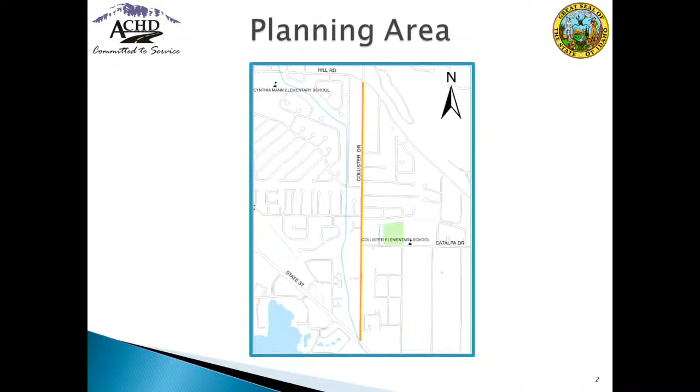The project purpose has two purposes. One is to facilitate the public outreach that clarifies the neighborhood's vision for possible enhancement. The second purpose is to prepare a concept study for Collister Drive from State Street to Hill Road that is in alignment with the neighborhood vision. The second concept study will only occur at the commission's direction. I'll go into further detail here in a moment.

Why Collister? We have actually visited with Collister in the past. 2011 was our first approach in identifying pedestrian projects and pedestrian facilities for Collister. However, in 2011, after the initial outreach, it was canceled at the direction of the commission. We did go back several times since then to visit the Collister neighborhood as well as adjacent neighboring streets to identify what would be appropriate.

We went back in 2015 and conducted the Northwest Boise Neighborhood Bike and Pedestrian Plan, which actually recommended concepts and treatments for Collister. We went back in 2018 with the Bike Master Plan update, where we identified bike facilities specifically for Collister. In 2019 as well as in 2020, the City of Boise identified Collister Drive as their 10th request within their integrated 5-year work plan request.

Our project approach: it's very important as we approach the Collister neighborhood that this time we get it right. We're going to go in there and listen first. We want to engage the neighborhood to determine what improvements the residents as well as the neighborhood want to see. We'll have several commission check-ins, and as I mentioned earlier, we will be coming back to the commission after we've completed phase 1, which is our listening phase. We will come back to the commission to seek approval to proceed with a full concept.

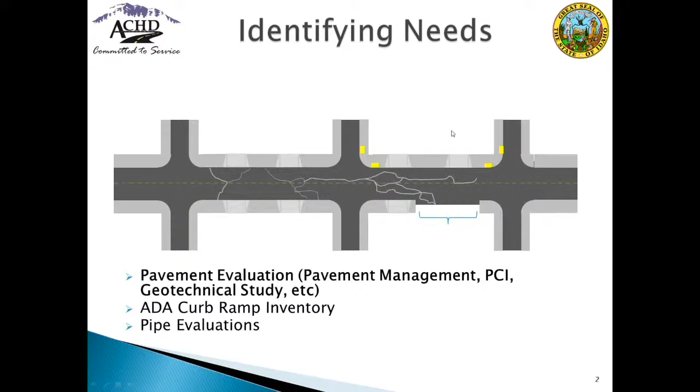Historically, as we've looked at this, what we've done is really focused on that pavement first. We've gone in, we've rehabilitated the asphalt, and in accordance with federal guidelines, we've improved all the curb ramps associated and connected to that. We've replaced any pipe in the area that runs under the road. We want to make sure that we get that repaired at the same time, and obviously we've restriped. But the projects really have not included any level of right-of-way acquisition, and so that's allowed us to be expedient in completing projects, but it also has some shortfalls in that approach.

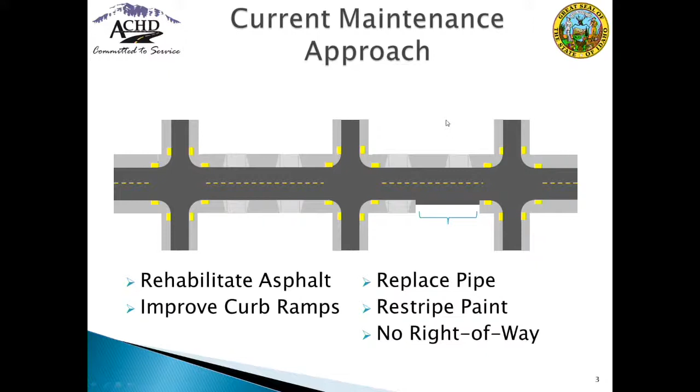As you note, nothing was done about the driveways, and that pedestrian gap still is there. Well, taking a look at the plans that the Commission has adopted, and looking at the desire for enhancing the system and taking advantage of expedient delivery of projects, staff has identified an integrated maintenance approach that, as we go in and look at that, using that current approach, still improving the asphalt, still improving those curb ramps, there are other improvements that we could be making at the same time.

This is just an example of some things, and I'll go over the criteria and the things that we've looked at. This may be in our bike master plan a location for a low stress bikeway, and we may be able to go in there at the same time, add the striping and add the signage that could be included. In our neighborhood plans, there could have been a pedestrian crossing identified, and so the intent is that we would look and identify that ahead of time so that as we are in there doing the maintenance, we could install that at the same time.

The other thing that's always interesting about what we've been doing, and this really was always in compliance with federal law, was we've improved these curb ramps, but in between you may have those driveways that are not accessible. So one of the things that we are recommending and have begun doing is identifying the high priority curb or sidewalks that have driveways in them, that we could be making those improvements at the same time to really make, at the end of the project, to make it fully accessible.

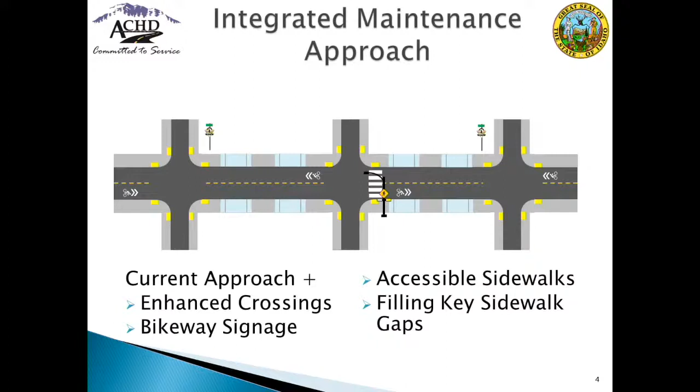There also may be those gaps where we were able to fill in connection with the project. It may be an interim treatment because there may be a more full improvement coming in the future, or it may just be a final design where we complete the sidewalk that way.

Really, the reason why we began looking at this is we recognize the Commission's increased emphasis on accessibility. We know in the adoption of our plan that there's a desire and there's a schedule there for trying to take care of those high priorities first. We see this as an opportunity to address that, as well as that increased focus on filling those key sidewalk gaps. But ultimately, ACHD has a complete streets policy that indicates that when we build, rebuild, or maintain a roadway, we will look at the needs of all users. Really, we see this as an opportunity to fully embrace that policy and begin to make those improvements all at the same time.

So what are the things that we've looked at? First and foremost, we're looking at the high priority sidewalks identified through our ADA transition plan inventory, and the key pedestrian gaps. I want to make this clear in what we're intending here: the intent is not that every road we do maintenance on, we're going to add a sidewalk. What we're saying is there are key places where there are gaps. These would be an arterial that has gaps on it, a collector that has gaps on both sides of the road, or a local street where the traffic volume is higher. We see this near schools and other facilities as really high priority gaps that we should be filling.

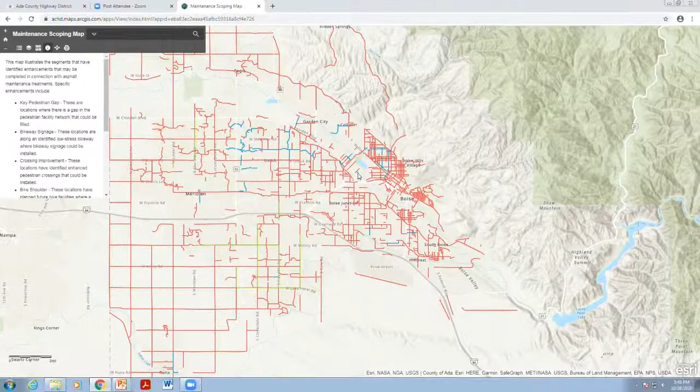Do they have a key gap? Do they have bikeway signage? Do they have a crossing, etc., that's been identified in one of our planning documents? And what this allows is for us to come in and see — so all of these that are red at least meet one of those triggers. It doesn't mean they meet all of them, but they meet one. And so as staff, as we look at one of these, we can see what's going on in that area.

So this is 20th Street from Lemp to Irene. In this case, there's a priority ADA sidewalk there, so when we go in, that's what we would be looking to add into the maintenance activity. But this is just a tool that we would continue to update to help facilitate that.

We also note in here, when they're selecting the segments, those that are planned to already be improved, just so we know that if they're picking that segment, they may be able to pick those and do the maintenance at the same time that we're already planning to improve them. Really, the goal is efficiency and expediency in really getting the projects delivered.

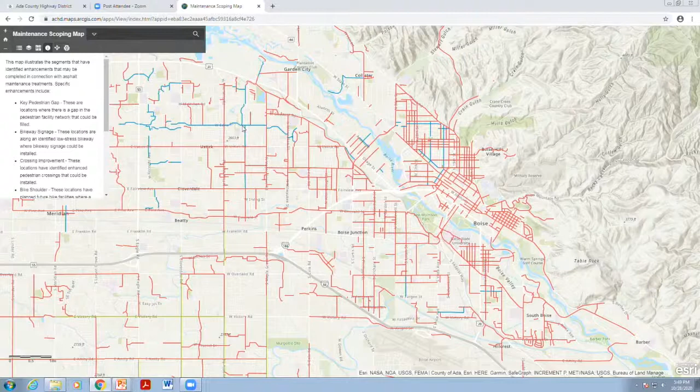With that, I'll stand for any questions you may have.

All right, Ryan, thank you very much. I like this, I like the proactivity. I like the fact, and I agree with you, I think in the long run it'll be more economical in the end, and certainly less disruptive than going back in and ripping out again and having that disruption. So I like this, thank you very much.

Commissioners, any questions or comments? Yes, Madam President.

I'm thinking the same thing. Commissioner Goldthorpe, I appreciate it very much, and thanks for all that work, Ryan and your staff, and for the direction that got you there. Thank you.

Absolutely agree. Thank you. Madam President, further questions or comments? Yes, Commissioner Hansen. Yes, I also want to thank you, Ryan.

This is great. I know our past discussions about capital maintenance projects and opportunities have really led to fruition, and I really like this. You mentioned like bulb outs.

I would suggest we should probably be more explicit about including an assessment of the need for traffic calming, and whether, in listening to the neighborhood, they have a perception of speeding on these streets. Because I know we can sort of look at it all and look at the map and see where there's gaps and non-compliant crosswalks.

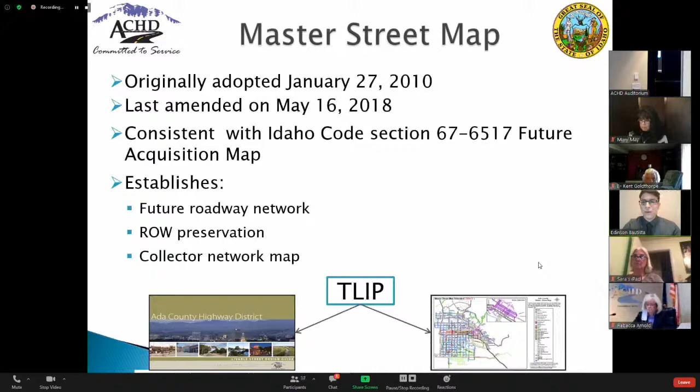The three primary purposes are: define a shared vision of a future roadway network between ACHD and its partner agencies, establish a county-wide right-of-way preservation map, and establish an existing and future collector network map. The Master Street Map helps establish a vision for projects in both the Integrated Five-Year Work Plan and the Capital Improvement Plan.

ACHD policy establishes two amendment procedures for the Master Street Map. One is through the ACHD Standard Development Review process, which is the vehicle for processing and commenting on requests to amend the Master Street Map associated with new development. Second is through a large-scale city or county-initiated comprehensive plan change or sub-area plans.

Within this procedure, policy establishes step-by-step procedures that lead either to approval or denial of the master street modification. Changes identified through this procedure become effective upon approval of the ACHD Commission, and these changes are not constrained to the 2-year update cycle.

For this master street update, staff identified key tasks throughout the process and separated them into phases. These phases included internal meetings, external meetings with city and county staff, presentations to committees like CICAC and CDAC, and analysis through the capital improvement plan process. Staff provided updates to the Commission at key points during each phase, summarizing the analysis and highlighting staff recommendations.

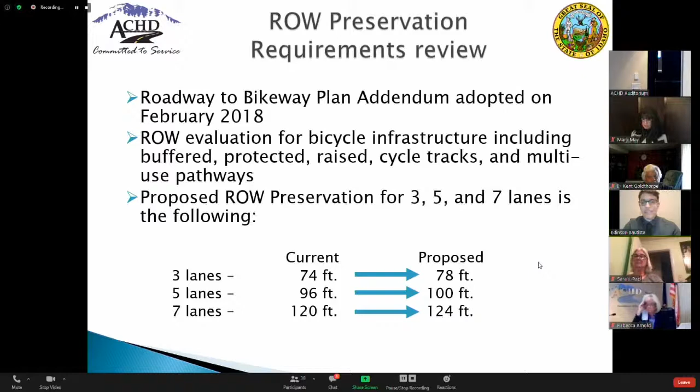The stakeholder outreach process resulted in the identification of 70 minor proposed modifications, including review and update of the collector network, roundabout network, and roadway typology, and 4 major changes consistent with the adopted Capital Improvement Plan. All proposed modifications were included as part of the staff report.

Through the stakeholder outreach effort, staff coordinated with the City of Boise, Meridian, Eagle, Kuna, City of Star, Garden City, and Ada County staff to identify modifications to the Master Street Map. These modifications were reviewed and discussed as part of this process.

Additional meetings took place as new requests were received and reviewed. Staff also presented to CICAC and CDAC at key points through the update process. All input was reviewed with key ACHD staff, including development and technical services and planning staff.

On July 9th, ACHD received a letter from the City of Boise City Council requesting additional modifications, including the addition of roundabouts at Lake Hazel Road and Apple Street, and Lake Hazel and Amyx Road; review of the planned number of lanes at Warm Springs Avenue from Wise Way to Eckert Road; and the addition of Mitchell Street extension north and south of Amity Road.

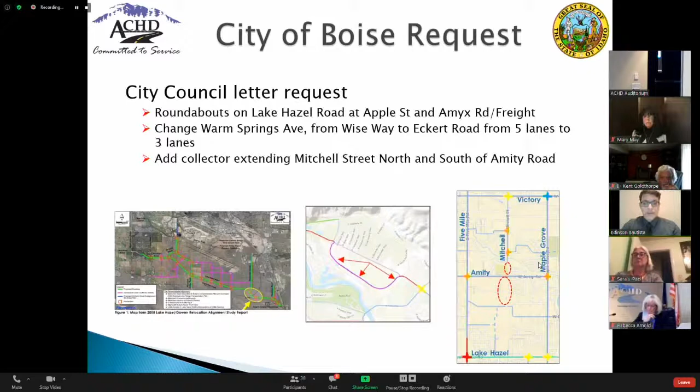The Warm Springs Avenue extension from Wise Way to Eckert Road was identified in the 2007 Harris Ranch Specific Area Plan and incorporated into the Master Street Map in 2010. In 2012 and 2014, the ACHD Commission heard and approved modifications to the Specific Area Plan. Specific to this segment, it identified key dates and thresholds for construction of the Warm Springs Avenue realignment and intersection improvements, including construction of an interim 2-lane section at Warm Springs and single-lane roundabouts.

Additionally, changes to the traffic impact study process were approved for the Specific Area Plan, which includes the submittal of a TIS after the development of 200 lots or more, or every 5 years. In 2016, a traffic impact study was submitted to ACHD, and the findings were consistent with the 2014 Harris Ranch TIS, where Warm Spring Avenue will need to be widened to 5 lanes in the future.

In the staff report, staff highlights that all improvements recommended in the traffic impact study should be verified with future TIS updates. This will ensure the improvements are constructed with warrants and necessary to serve the site.

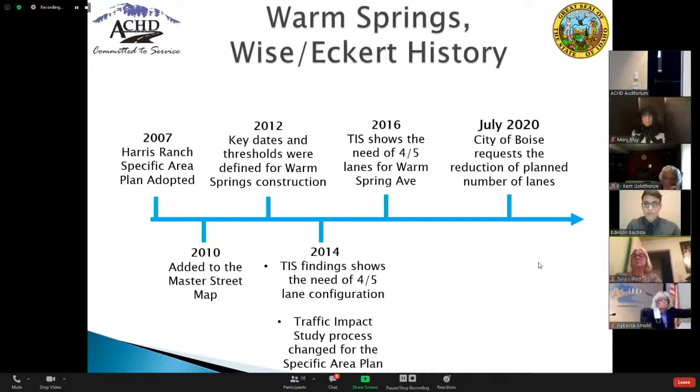Following ACHD policy, the Master Street Map Amendment established a process for changes based on specific area plans like the Harris Ranch Specific Area Plan. ACHD staff recommends a traffic impact study to evaluate the need for the area of Warm Spring and update the specific area plan before its implementation to the Master Street Map. The changes identified through the TIS will be presented to the Commission, and upon approval, the modifications become effective and can be incorporated into the Master Street Map.

Changes to the Master Street Map are not constrained to the two-year cycle. The city's request for the reduction of the planned number of lanes on Warm Spring Avenue has not been supported in previously completed traffic impact studies. Staff recommends that prior to further consideration of this request, the city provide an updated TIS.

The Master Street Map provides ACHD with a clear strategy for right-of-way to be preserved for future build-out of the roadway system. By preserving for future needs through development, ACHD is able to construct needed improvements at a lower cost and with less disruption than would occur if the right-of-way was not preserved. Any projects to build additional lanes in the right-of-way will require ACHD Commission approval through the Integrated 5-Year Work Plan and the budget process.

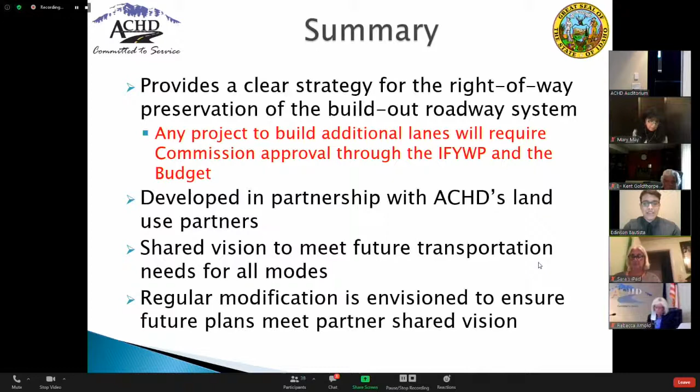The Master Street Map is also a key tool that is used for project development, scoping, development review, and it's directly tied to the ACHD Integrated 5-Year Work Plan and Capital Improvement Plan. Staff recommendation is to adopt Resolution 2324, approving the Master Street Map as amended. With this, I conclude my presentation, and I stand for any questions.

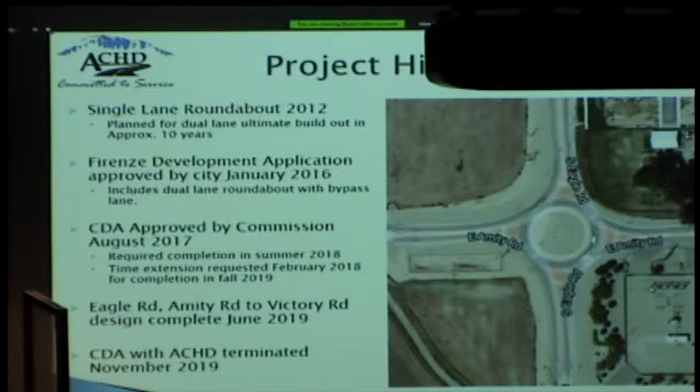During this time frame, the Highway District was moving along with the design of the roadway section of Eagle Road from Amity to Victory to correspond with the development and build out of this dual-lane roundabout. Ultimately, the roundabout was never expanded, as the development agreement with ACHD was terminated in 2019 between ACHD and the developer.

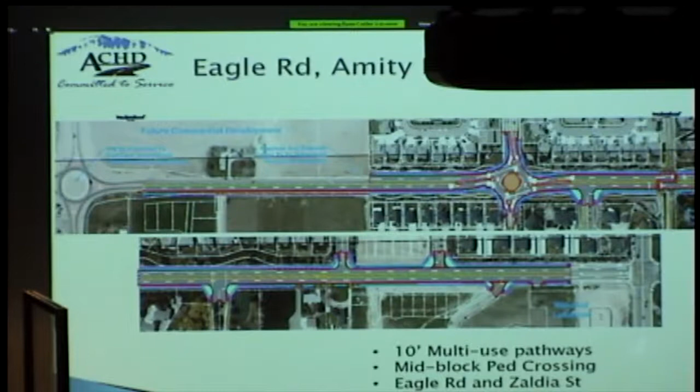This is the design that has moved forward for the dual-lane roundabout at the intersection of Eagle and Amity. We'll have RRFBs at all of the crossings. There are, and also future pedestrian connections to the east, south, and west as changes are made in that area. Also, you'll note here where my cursor is, there's a south bypass lane for vehicles traveling south and then to the west.

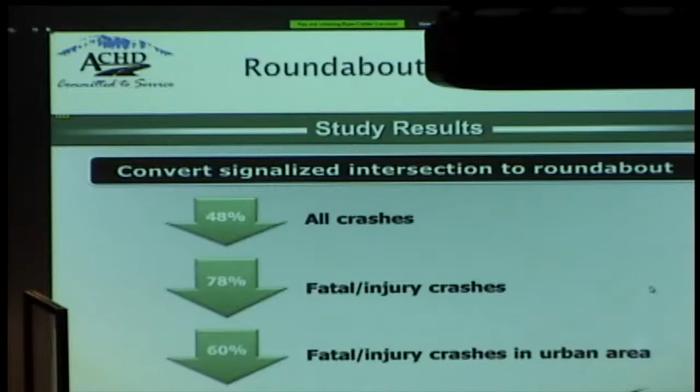Along with that, we have noted, and it has been stated by FHWA, that roundabouts versus signals, when you have a roundabout, all crashes decrease by 48%, and fatal injury crashes go down by 78%. We see a large difference in the overall number of vehicle crashes, but also the fatalities in those crashes. This is also pointing out the pedestrian safety of crossings at a roundabout.

With pedestrians at a regular signal, there's 16 conflict points, and at a single lane roundabout, there's eight conflict points.

Just for reference, currently the speed limit on Eagle Road is 45 miles an hour. Potentially it could be decreased to 40, but as you can see, it hits into that 40-mile-an-hour range where fatalities are more likely. Currently, our design speed for the new roundabout is 27 miles an hour at its highest, which puts us in this lower category, making it, we feel, a much safer option for people crossing at this location.

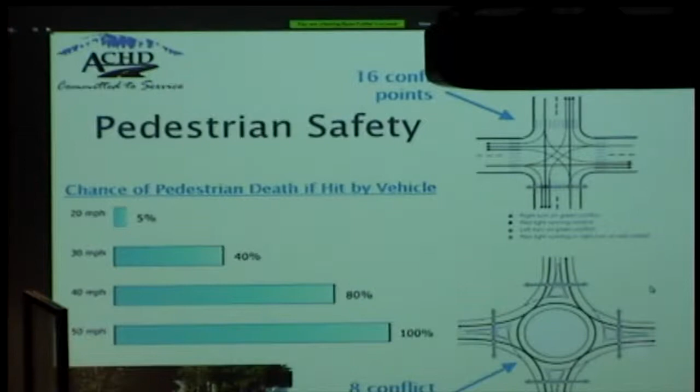There's been some discussion about the multi-use path and how it connects and crosses over the local roadways, turning onto Eagle Road. We pointed out through studies that it's indicated that when the roadway is of a higher speed, such as Eagle Road, as you come to a crossroad with the local roadway, if you separate those crossings, it gives the opportunity for the vehicles and the pedestrians to see each other a little bit better.

The curve of the 10-foot pathway as it comes to the local roadway also allows pedestrians and cyclists to slow down to see vehicles better, and also for vehicles to see the pedestrians better. The conflict with the vehicles and pedestrians is also pulled away from the corner of the intersection, back away from the roadway. It also limits what we've all probably seen happen before, when a car pulls up to an intersection and parks or sits staged right across the crosswalk, making it difficult for the pedestrian to either go in front of or behind the car to make it through that crossing.

When we pull this away from the intersection, that allows that conflict to be pulled away from the roadway, letting a car stage in front of the crosswalk as it prepares to go out into Eagle Road. Also, as a vehicle turns off of Eagle Road in this instance and approaches the crosswalk, it allows the vehicle to see head-on the individual that may be ready to cross the road, instead of them being in a blind spot as they're turning the corner.

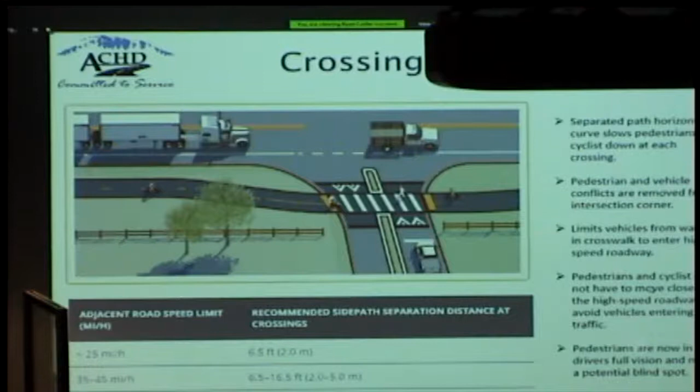As you're aware, the development agreement with the property owner on the northwest corner ended in November, which required the Ada County Highway District to move forward in designing the roundabout, which we started last March of 2020. That included the City of Meridian and the Land Group, representing the property owner on the northwest corner, joining in to help us with the design of this project. It also included some analysis by our own ACHD traffic team, which we completed this last September.

On October 7th, this project was put out to bid, and Central Paving was the apparent low bidder. It's worth noting that Central Paving's bid came in 21% below our engineer's estimate and 13% below our budget, so we were excited about the bid received on this project.

We're here tonight for a commission bid approval, which includes both the roundabout and the roadway section of this project. Also of note, the utilities that need to be moved for this project have a notice to proceed of November 9th. They're already preparing to move forward, and Idaho Power has already contracted and awarded their contract to a team to move their utilities, anticipating starting in about two weeks. We anticipate our construction notice to proceed, if awarded tonight, to start on November 19th, 2020.

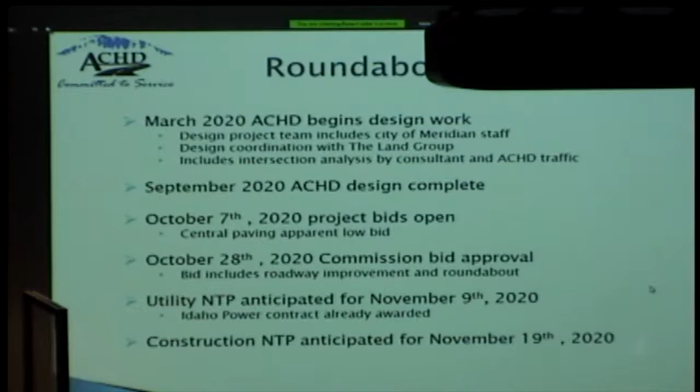Just to give you an idea about some fiscal implications on this project, taxpayer dollars spent to date, including the design of both the roadway and the roundabout and all of the right-of-way to do so, is around $1 million.

If there was any change to the design in this project to look at a more traditional signalized intersection, we estimate that might be around $300,000 to contract a design team to go ahead and do that.

We've also looked at the new bid escalation. Currently, our bid is at $6.7 million. We anticipate that any change in this project might push it out to 2024 for the new construction date. By our escalation numbers, that would increase the bid potentially to $7.6 million, assuming the new design came in at the same amount we have for the roundabout now. That's about a 13% increase from the dollar amount we have for our bid today. So spent to date plus redesign and potential project bid differences moving into the future. Overall, any changes to this project could potentially cost the taxpayers an additional $2.2 million.

At this time, recommendation from staff is that we approve the bid and award the contract to Central Paving Company and move forward with this construction project. I would stand for any questions.

All right, thank you, Ryan. Commissioners, any questions or comments for Ryan? Yes, Madam President. Commissioner Goldthorpe.

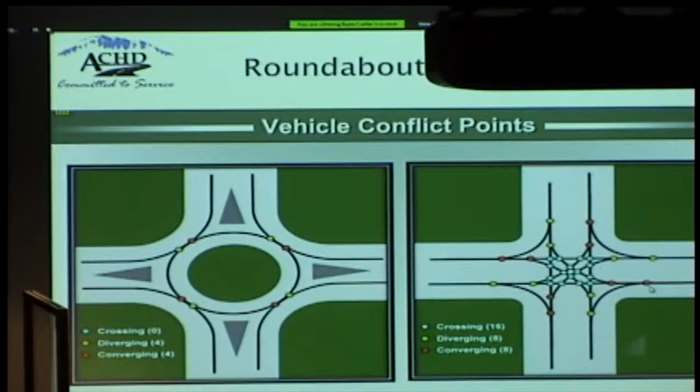My main concern with this particular design is that free running right turn, which I can't see. It wasn't in this set of documents. There it is. That free running right turn, because it's an opportunity to accelerate, and the whole idea of a roundabout is you actually have to decelerate in order to maneuver around to get through.

Yeah, Madam President, Commissioner Hanson, great question. Obviously, our team analyzed this extensively as we went through the design. You'll note as you come south to west, there's a little bit of deflection and curve in each direction. Part of the reason we did that is to require vehicles to slow down a little bit, even if they're in that bypass lane. We also added flashing beacons at the crosswalks to make sure vehicles can see that somebody is in that area preparing to cross.

The difference between a roundabout, even one with a slip lane or bypass lane, is that the area a person has to cross is very short before they have a refuge and can move on to the next area, which is the case here. At a bypass lane, they're likely crossing about 12 feet before they're into a refuge area. Then they cross an additional amount of lanes where they have another refuge area, and then cross the final segment. So there are many areas for the pedestrian to find safety in the roundabout, as opposed to a signal where you push the button and then cross all the way across the intersection.

So I agree with your statement that we're expecting vehicles, by bypassing the roundabout, to have some acceleration, but we also expect coming into that there will be some deceleration to make that corner, as it has been designed to slow vehicles down a little bit, and then to have them speed up after they get past the second pedestrian crossing on the west leg. It still requires people to pay attention when driving, but it's that shorter crossing distance and the flashing beacons that we anticipate will be a benefit for pedestrians.